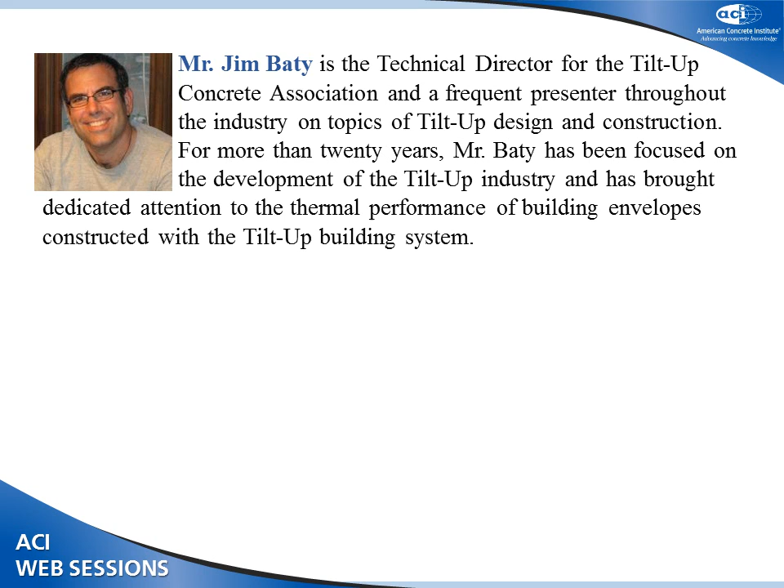So wrapping it up this afternoon, hopefully we'll take a few steps through this topic, and then maybe that's going to encourage you to come up with some questions that the rest of our speakers can join me and we can talk to you a little bit about. But I want to talk about the global acceptance of tilt-up and the global implementation of tilt-up. One of the things that we tend to do in the industry specific to the U.S. and to our associations, we tend to look a little bit too close to where the volume of tilt-up is.

And there's no denying the fact that the volume of tilt-up construction has largely been in the U.S. It's largely been in the big box market, the Target distribution centers like Ed showed. There are some incredible projects and incredible density of projects in the multi-story buildings that Sean has taken us through. But it's the idea of dramatic form and the global acceptance of that dramatic form that I find to be one of the more intriguing things about tilt-up.

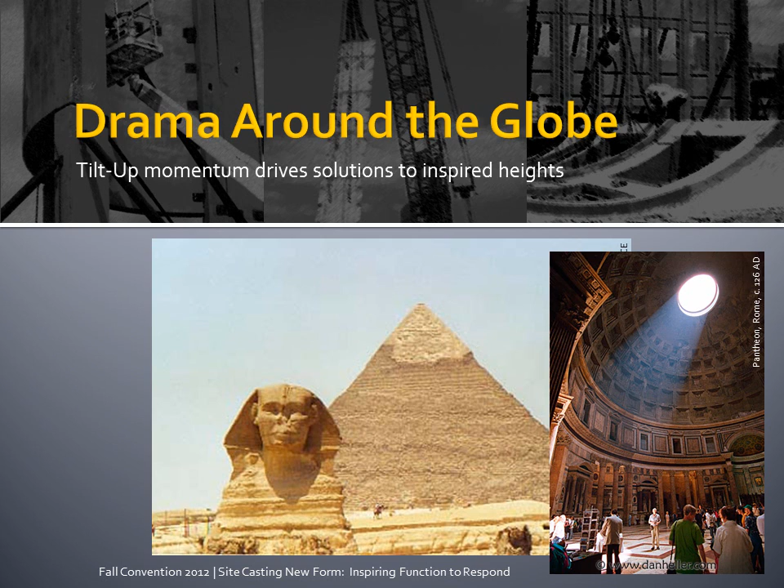And so what is drama in form? What do we think of when we think about dramatic buildings that stand in the landscape and give us a recognition? Now, historically, drama has come from the presence of the building in its final state. And so, you know, the Egyptian pyramids are one of those that jumps out in my mind. Ed showed you the Pantheon, and certainly that's a dramatic example of building that has existed for a long, long time. Continues to perform, continues to be awe-inspiring.

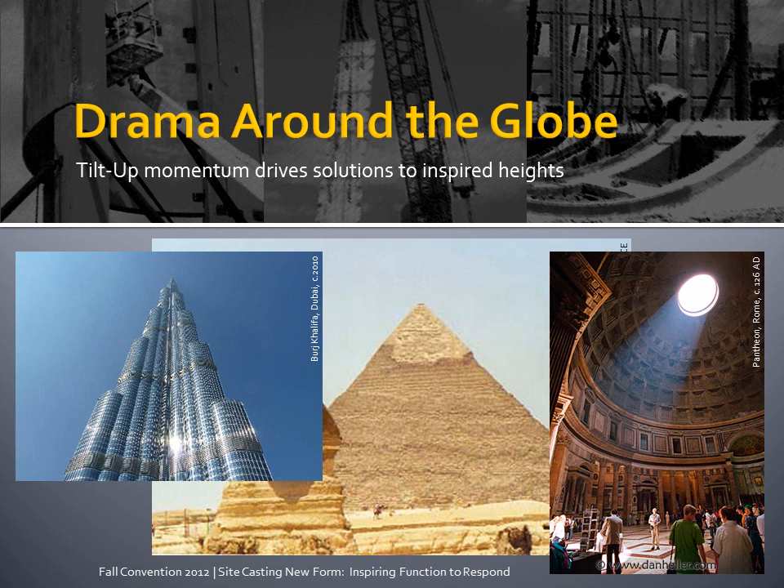And perhaps one of the more recent examples, the Burj Khalifa, is an example of modern technology that once the project is finished is a statement of dramatic alteration to the landscape. But realize that in all three of those examples, there was this tremendous duration of building schedule that had to take place. And at any one point that you walk away from the construction and come back, there's liable to not have been much change. So over hundreds of years the pyramids were built, over multiple years the Pantheon dome was installed, and over many, many months of work cycle, Burj Khalifa was put in place.

So I'm going to take you through some equally as dramatic geographic locations. I'm going to look into South Africa. We're going to look at 4 projects in South Africa: the Freedom Towers and the Walter Sisulu Square of Dedication that you already got some glimpses of in Ed's presentation. Sibaya Casino also, Ed showed you a little bit of that. Another fantastic project, the Gateway Theatre of Shopping. I also want to then go to Jordan, and we'll be looking at a housing prototype, so that we can get a sense for drama of form and drama of development and delivery in 2 dramatic scales if you look at those last 2 types.

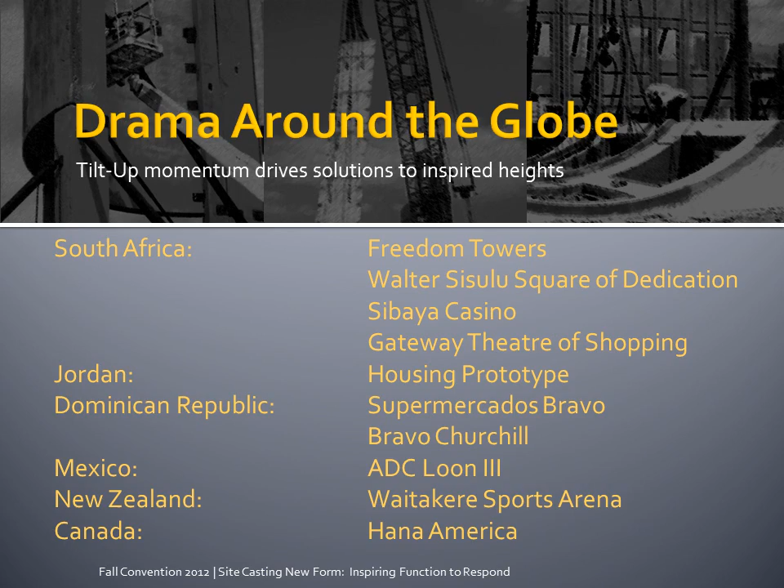Well, I'm also going to be in the Dominican Republic looking at Supermercados Bravo and Bravo Churchill, in Mexico at ADC Loon III, in New Zealand at the Waitakere Sports Arena, and back here in Canada looking at Hana America. And so from a global perspective, being able to take a look at drama, form, and function, I want to take you through 4 concepts that I have for you today. One is we're going to identify the presence of drama. How does drama in tilt-up differ for me in terms of looking at the here and the now and the process versus the drama of form in its eventual position in the landscape that you see in the pyramids,

Burj Khalifa and Pantheon. And then from that, understanding the liberating freedom and why form creates such drama in tilt-up, but it's the process itself and the liberating freedom that comes from the construction process that delivers that form. And from there, I'm going to use some of these examples that I've just listed for you to visualize the powerful form that's available. We've seen a lot of that already, but create some more examples in your mind that ultimately allow us to see the partnership of that form, the delivery method, and how the functionality of tilt-up structures are changing because of the form that's able to be delivered.

It's really my goal today. So let's start off with the presence of drama in the tilt-up industry. And for me, drama isn't that final building. Even though the One Haworth Center is a fantastic project and is certainly emulative of the type of drama that exists of a final production or construction delivery to the landscape historically, it's the process that gets you there that is so dramatic in tilt-up construction.

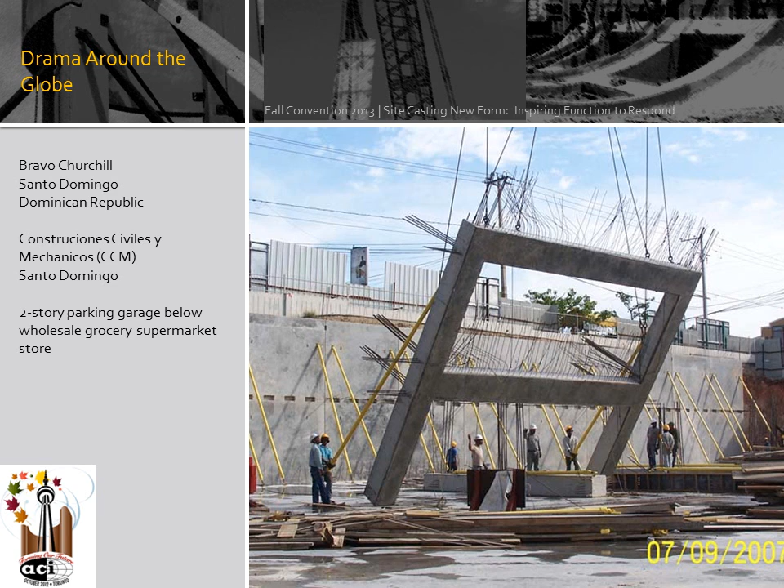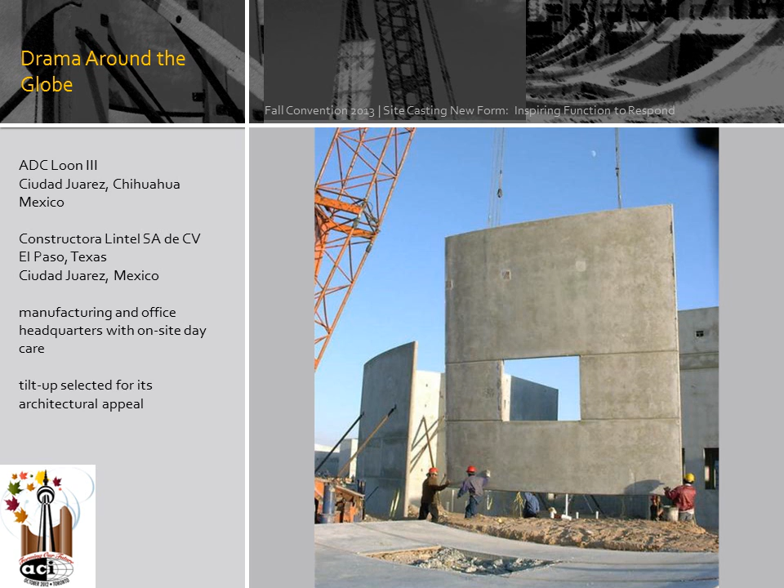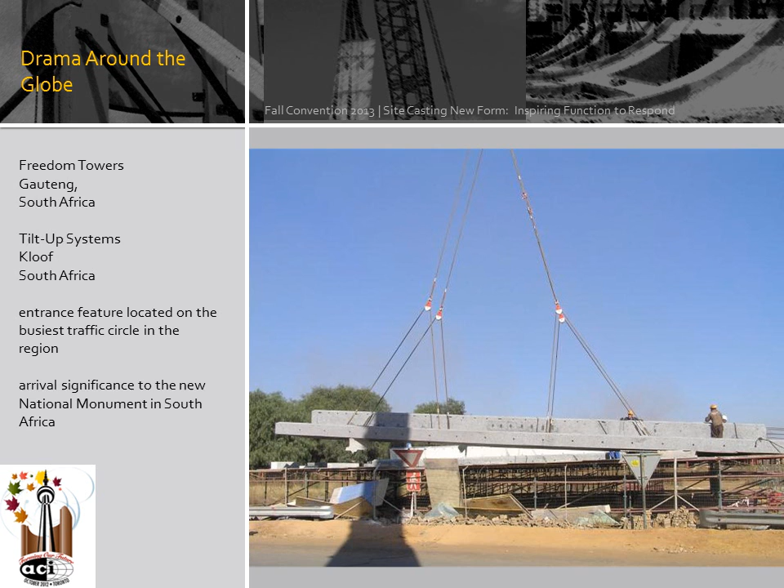And this is the erection process for Gateway Theatre of Shopping. And again, really large panels in relation to the scale of the site, but because of the size of the building, even the size of the panel that is so out of scale to you and I, the panel itself is so out of scale to the building itself because of the sheer size of this project. 3.42 million square feet under roof in this shopping mall. So a project that any of us would envy the opportunity to deliver.

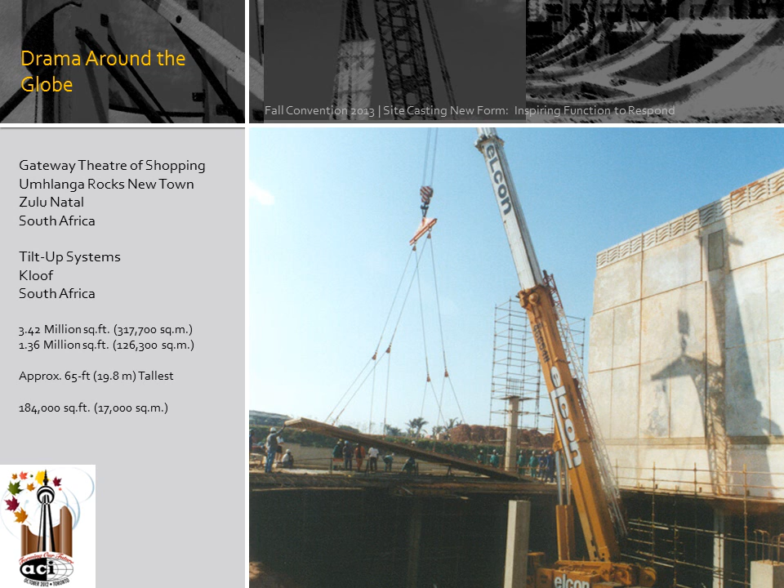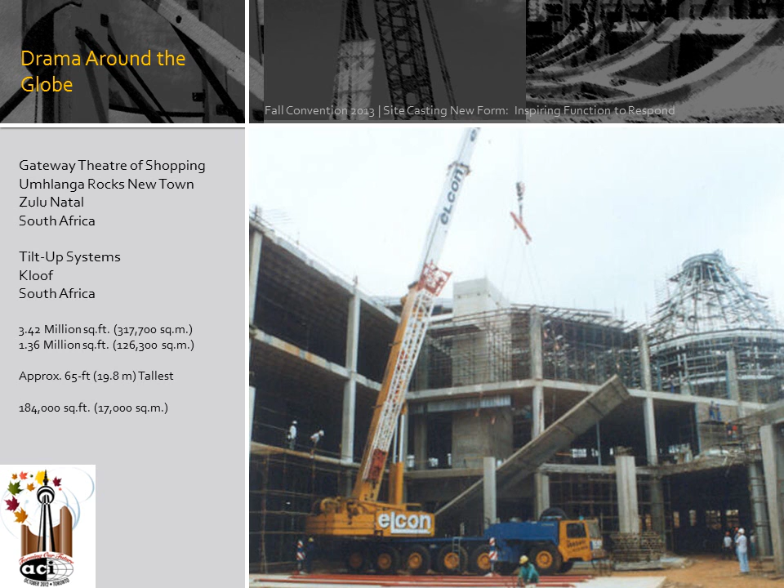And this is just an interior view of a panel going up in the courtyard portion of this project. But again, the sense of scale as 3 stories of larger than normal story height plates are being closed in by these massive tilt-up panels that were horizontal at one moment and vertical in the next. And again, another very large panel. This is the Supermercados Bravo project, also in the Dominican Republic, and you can see the variety of openings that are achieved in that. But the mobility of these panels on the job site, and the fact that here's a rather large mobile crane that is responsible for lifting this, getting it to vertical, and then moving it across the project site.

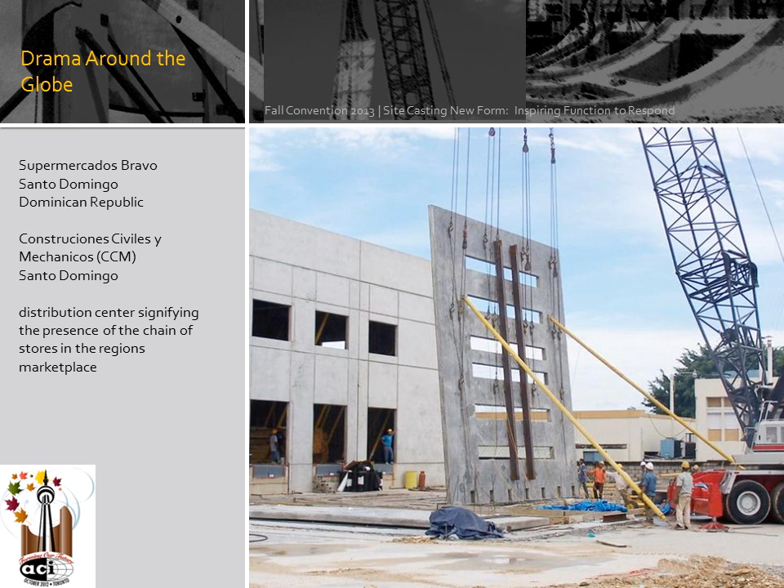And in relation, in many respects, to the project that Kimberly just showed you, the museum project, this Hana America project in Niagara Falls, Canada, you can see a very unique application of a tilt-up panel, somewhat like Sean showed in the multiple-story individual height panels going up. But look at the large return that happens on this panel across the top and down the side, and they're literally hanging this panel off of 3 masonry columns, if you will, and you'll see how that gets folded into the project itself. But some very dramatic movement taking place on the job site.

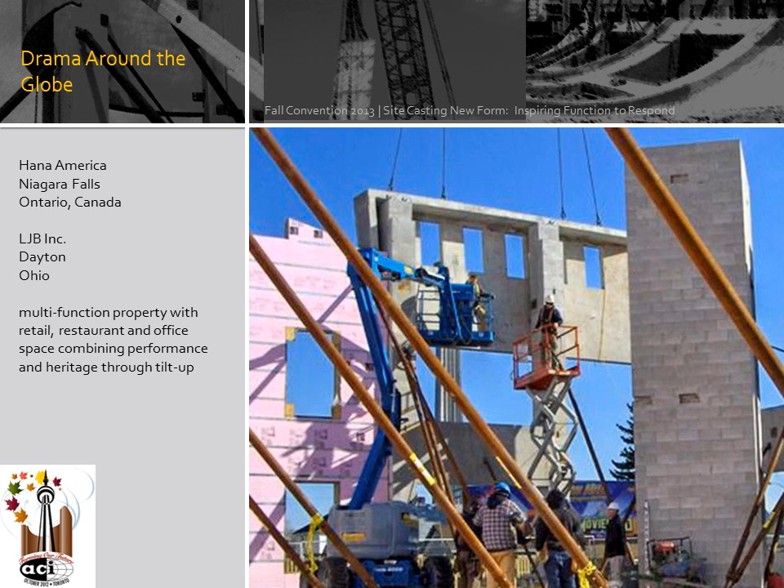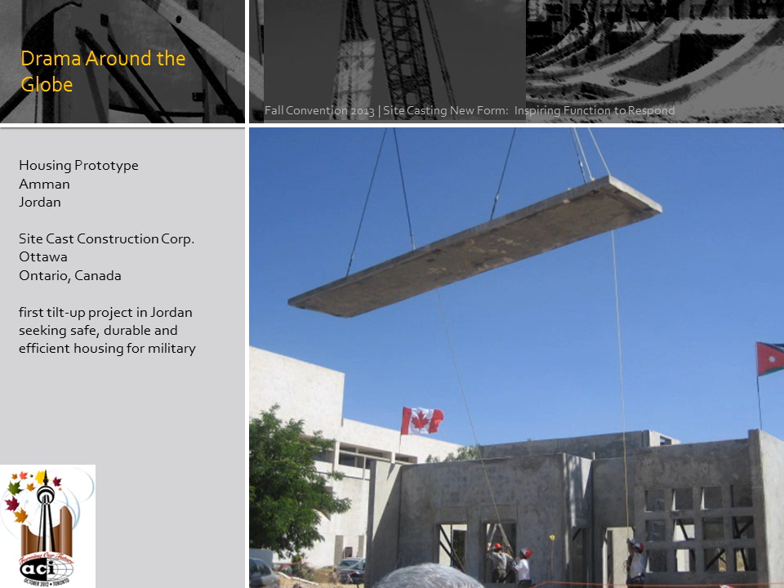And then over to Jordan, and here you have the substructure for a prototype house that was set in place, and then one of the final roof panels being set by aerial crane here. Now, this is probably one of the best examples of there being nothing on the job site, and then all of a sudden there being something on the job site, and that something being a finished structure. And so the drama that happens in tilt-up construction oftentimes results in almost a pure horizontal site that could be mistaken for somebody preparing a subgrade slab, and then instantaneously, in a day or 2 days, there being a structure there that is now the visualization of the dream that the owner had, and the delivery of the design and the intent that the architect put in place. All of a sudden the contractor flips a switch in many respects and dramatically makes a building appear.

And of course we can't talk about form and movement and drama in tilt-up without going back to that image that you saw earlier from Walter Sisulu of this radically curvilinear panel that, in this one, is flat at the base and curved at the top, and it has sister panels that were flat at the top and curved at the bottom.

And the fact that the very nature of picking this concrete panel up while it's still wet until it forms itself the curve that it wants to be and then cures. No, really, it just cured. I'm just teasing you. But this panel was built as a skateboard ramp.

I mean, you can imagine maybe some teenagers after that panel was lifted going back to the form and having some fun and spinning their wheels along their skateboard ramp. But a very dramatic example of form moving across the landscape and developing imagery for the owner.

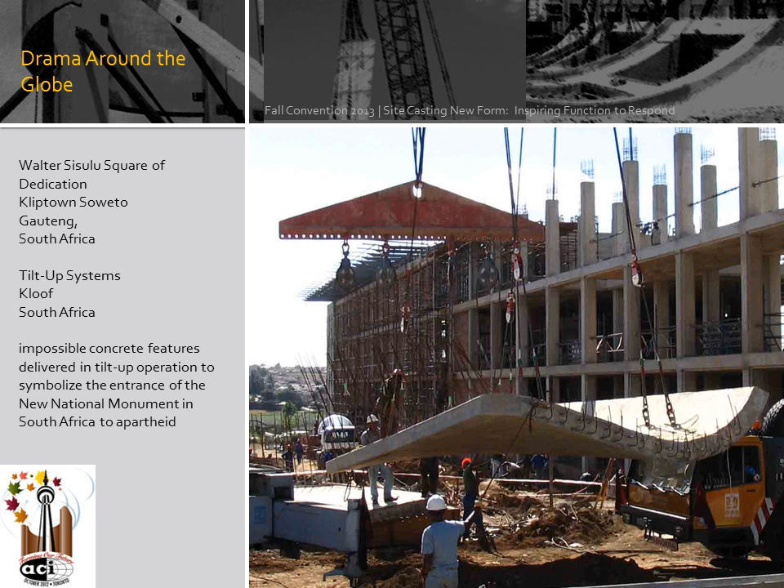So how drama of form takes shape because of the nature of tilt-up construction is what is so unique about this site cast method of delivering building technology. And it's very liberating freedom. The essence, the basic nature of the process that gives it that liberating freedom.

Here's another view of that massive tilt-up structure frame that I showed you before from the Dominican Republic. Again, a 2-story parking garage, and you can see the successive frames that were all site cast on this base slab that's 2 stories below the rest of the grade. And those are all stood in place, ready to be tied in with some cast-in-place beams that will connect them all, while at the same time tilt-up panels are being erected around the top.

I guess I could use a pointer here for you. While the tilt-up panels also cast in this same slab area are being stood up into the perimeter, both as retaining walls for the grade and the above-grade structure that will house the supermarket above.

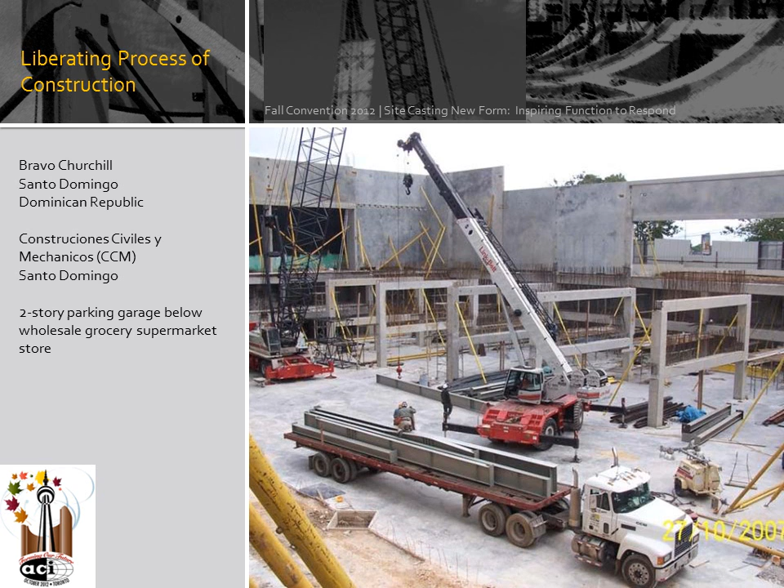And the fact that tilt-up construction begins horizontal, begins on a simple concrete slab, whether that's a structural slab, most often not structural, but here you have what vertical formwork only amounts to the thickness of the panel. So literally anything that is created in the minds of the designer, and certainly as Ed showed you from Mitch's design for that Korean War Memorial, virtually any dream that can happen can be placed in tilt-up technology.

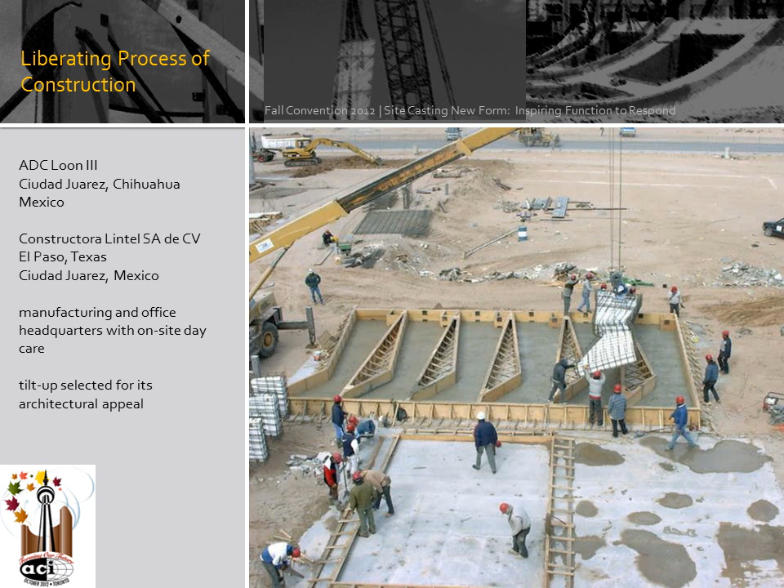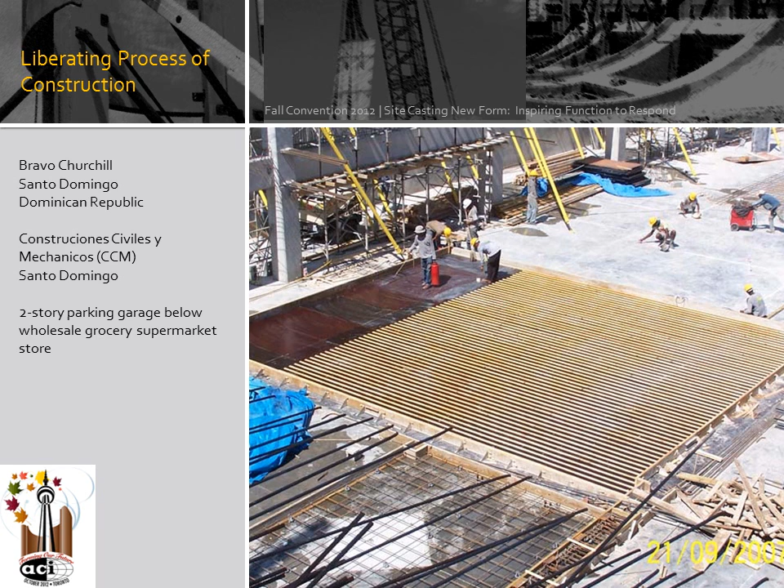I've been on this project. It's a very, very striking project, although when I show you the final version of it, you're going to go, well, that's no big deal. But there's a reason for that. So again, it's in the drama of the construction.

And the site itself, the fact that all of these panels are all laid out, and this is that horizontal nature, that fact that you show up one day and the site's flat, and you show up the next day and the site is suddenly built, or maybe less than a week later.

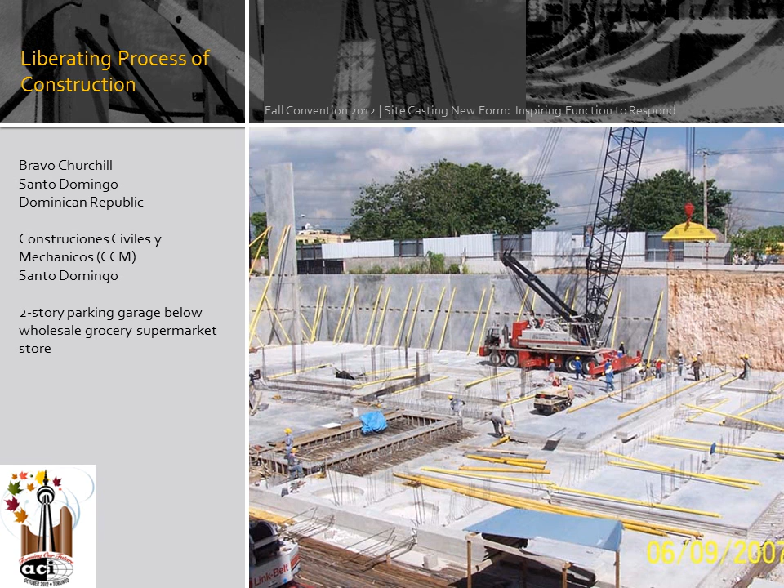But all of these panels are arranged and planned in their specific location, and the fact that in this project, here we are below grade, and yet they've got this crane that drove down into the basement and is setting these panels. And I can imagine what this site was like for all the residents of the community as they're peeking over the hurricane fence down into this hole and watching these massive panels being moved around by crane. Truly a dramatic instance.

Here's one of those structural frames being set. You can see the rebar that sticks out. So the contractor, who was also engineer for this project, broke the parking garage into these horizontal frame structures, replicated them as many times as he could, stood them, braced them, and then the connections between the two of them, they just formed up cast-in-place beams and tied all of those frames together.

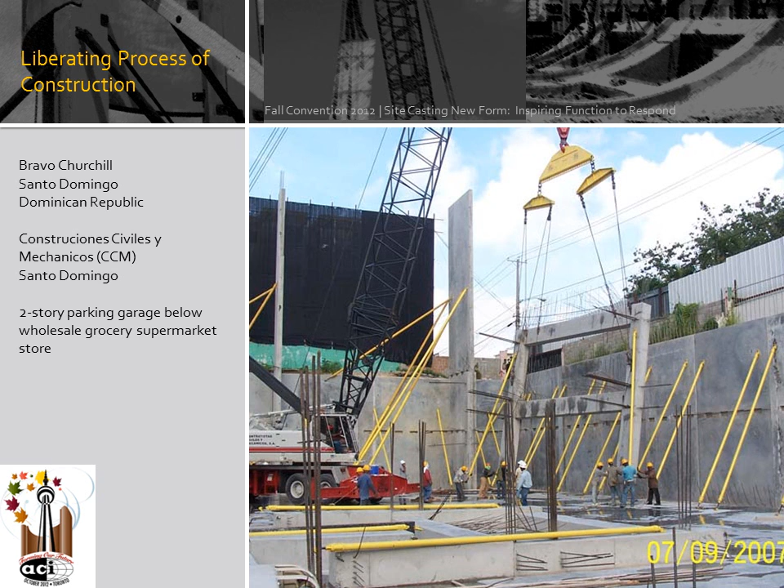So it eliminated the amount of cast-in-place forming that they had to do, or they reduced it. They reduced the cast-in-place forming by 2/3 and were able to speed up the project. The last time he told me, I think it was something like 2 months were saved in the structural component of this parking garage by being able to tilt up most of the structural frames.

Just another example. And this is regardless of the method of construction, but it's certainly a great example of where drama exists in photographing construction today. But you can see the massive nature of those tilt-up frames, the repetitive braces. That's just an imposing vision in this photo.

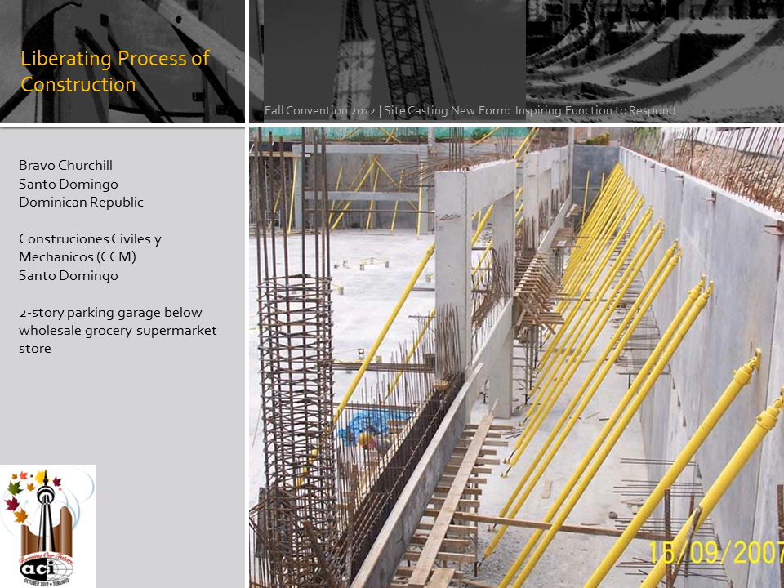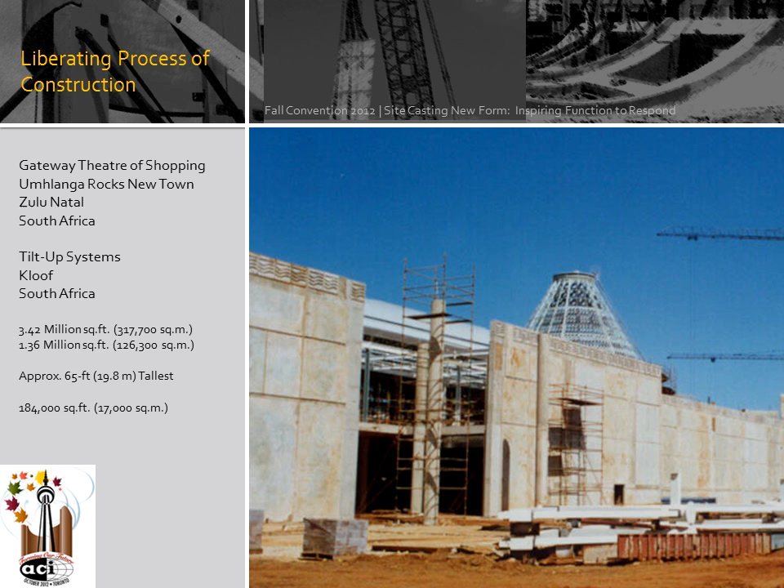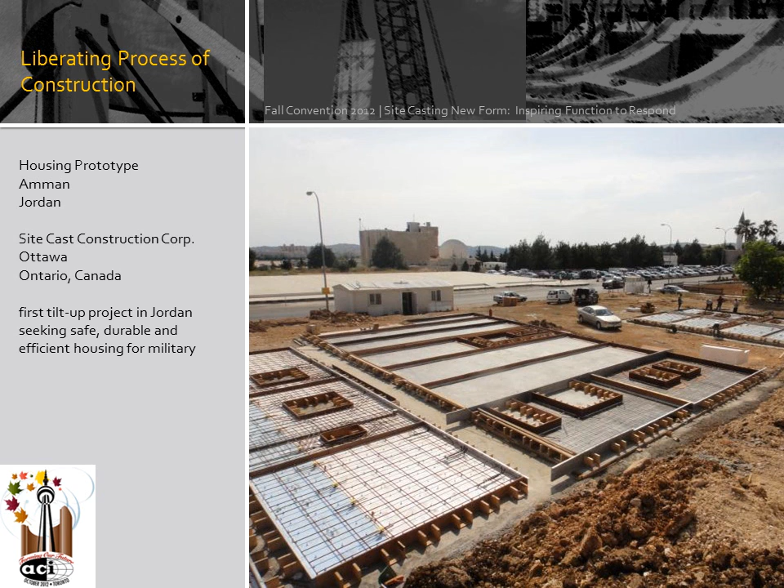And here are the panels. This is it. This is a house set out before you. And that's about all it takes to put up a house. And so literally you can see, once they've cast those forms full of concrete, let it cure for a couple of days, and decide this is the go time. From the moment that the crane grabs the first panel to the time that the crane releases the last panel, it could be a day, could be less than a day, and suddenly there's a house there, ready for somebody to at least begin picturing the ability to inhabit.

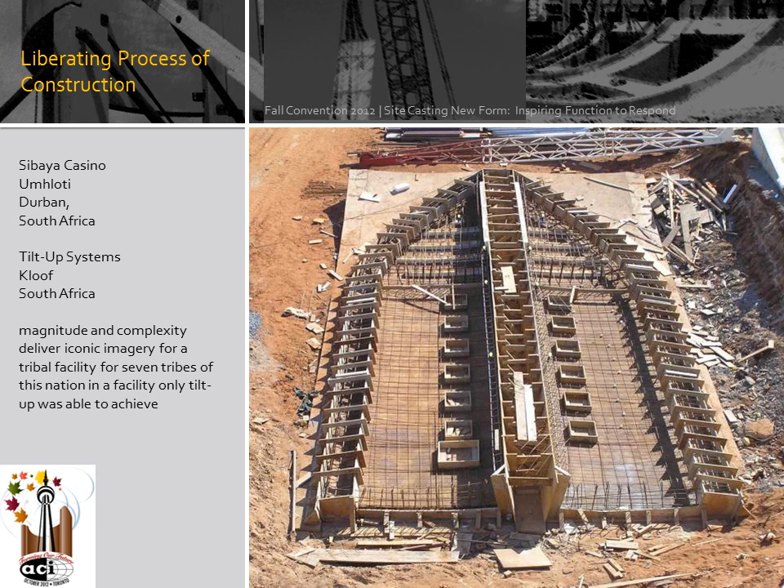And drama certainly takes place in the construction process itself, just in the forming. Now you saw an image of these in Ed's presentation. This is one of the panel sets for that Sibaya Casino project. But imagine tackling the architectural vision with the translation to site forming that took place for this contractor, and having to go from two-dimensional drawing to this three-dimensional reality that is the inverse void he has to create to produce the finished form product. The magnitude and complexity of this in a dramatic example of construction for tilt-up, I think, is perhaps one of the more striking ones that I've still yet to come across.

And this is the skateboard ramp. This is where the teenagers, they left those in place so that the teenagers don't skateboard on the sidewalks. They go to the forms. But who thinks of that? I mean, that is creativity. Creativity that an architect was able to think of concrete, first of all, in that type of a form. And then after everybody, architect, engineer, owner, we're all done saying, well, we're going to have to scrap this idea because we can't build it. And a contractor came in and said, you can't build that in cast-in-place because there's no way to support those forms, but I'll do it in tilt-up for you. That's an example of creativity to the nth degree.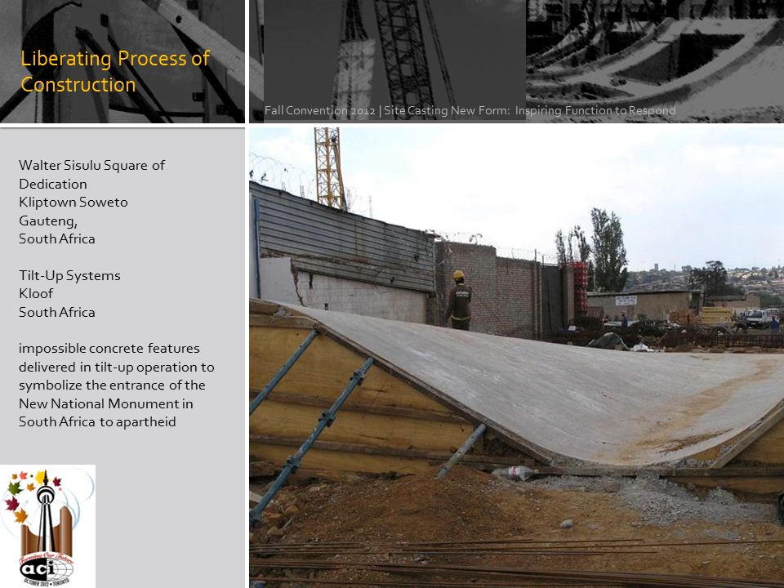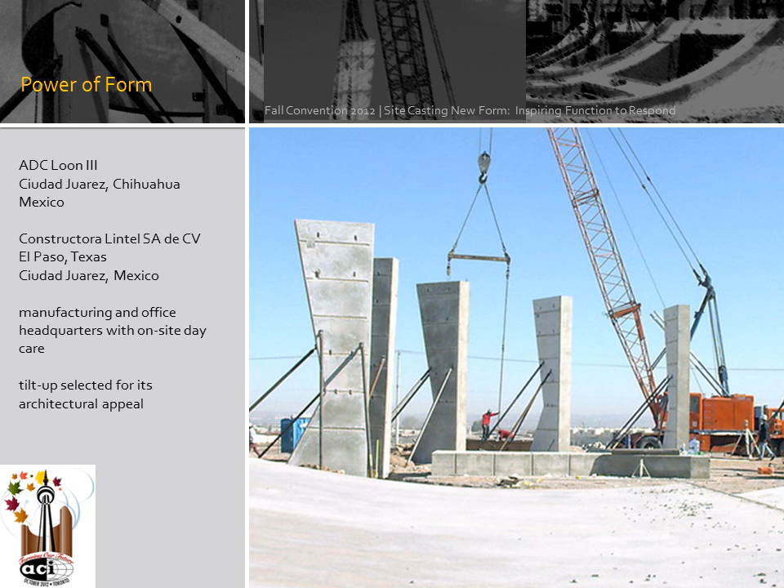So if we haven't had enough of it already, I want us to visualize the powerful form then that results from this liberating freedom of technology. There's your structural columns that I showed you earlier for ADC Loon III in Mexico. These are K columns, or they called them K columns, and you can kind of see, just in the nature of the photograph there, a little bit of the K nature. You can certainly see it in that one. But these columns support curved lintel panels that form the roof structure for a main entry feature for the office side of this manufacturing facility, and then they replicated that off to the side, and it housed the daycare for the employees that come to work at this facility. It's a beautiful example of form in this landscape.

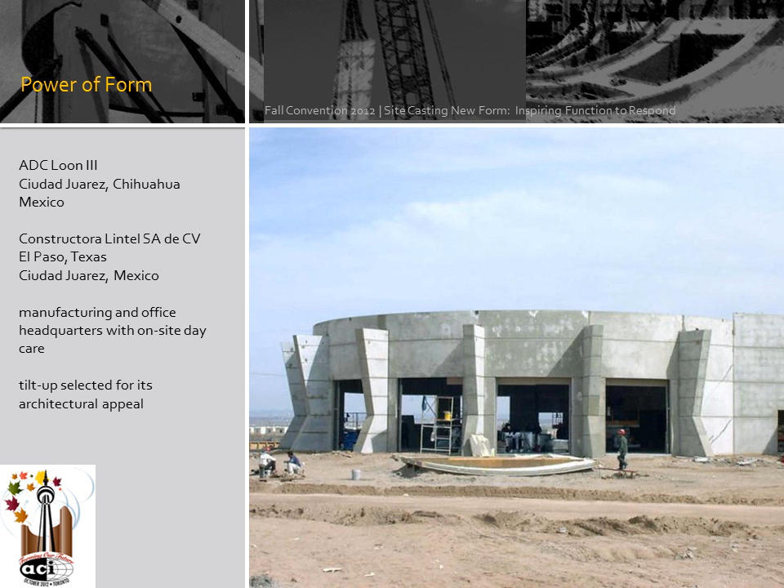Again, here's the structural columns, and set in place over them, these were kind of T-shaped and curved all at once. Lintel panels that hang off of the tops of these K columns, and once welded into place, as Sean said, it becomes a very secure and very dramatic structural component in this particular case as well.

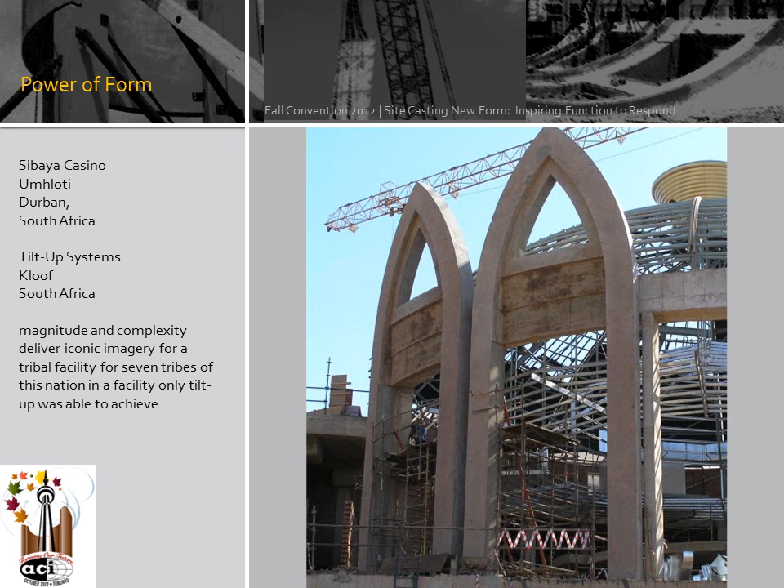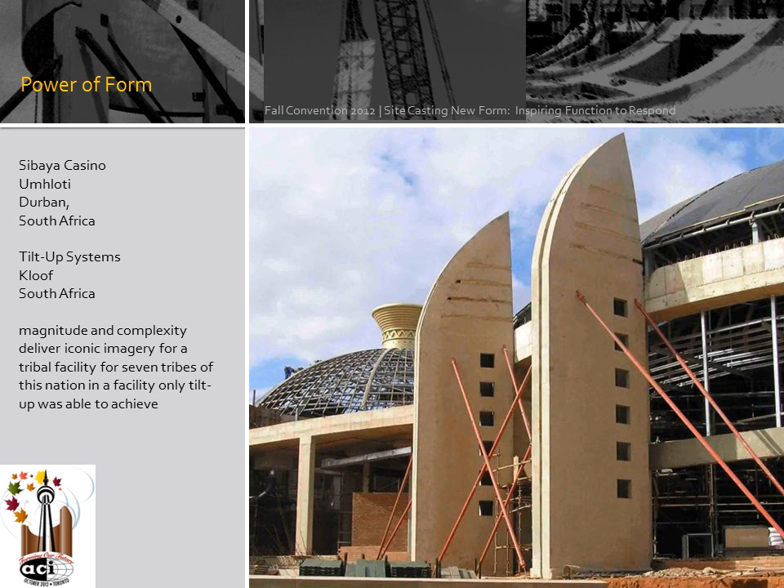And you'll see some variety. This is one of the construction shots of the Sibaya Casino. This project was 7 pods representing the 7 tribes that were in that region that came together to create this casino, and so each tribe has got to have a different architectural variety that at least gives them homage to their tribe. And so each one of these were designed differently, so you'll see that in each of the photos. So we go from structural support that was flat against the domes to these sticking outward, perpendicular to the dome. And these shells are bowed in plane as well as curvilinear in the vertical plane, and they vary in thickness. And so each one of them was unique in its character.

But you can, again, get a sense for drama in the scale of the project. Another massive project. There's plenty of landscape in which to seat one of these in South Africa right now. 3.42 million square foot shopping center, and I believe this is something like 340-some thousand square foot casino.

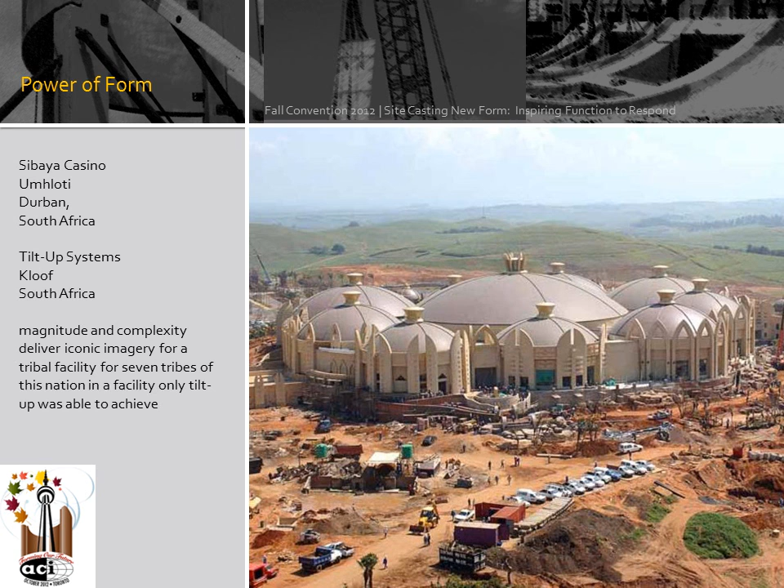But the power of form also can be quite simple, and this is Supermercados Bravo back in the Dominican. And what you're looking at here is a simple tilt-up structure, a simple tilt-up. Ed was showing you monumental tilt-up and signage. Well, this is a single tilt-up panel that is the structure for what? The stair, right. So here you have the entrance.

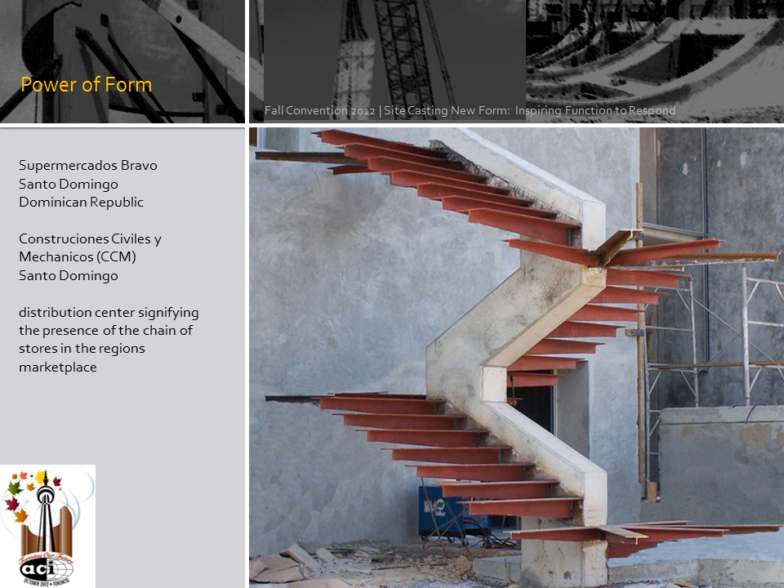This will be the entrance to this facility, and it's part distribution center, part headquarters for what is 7 different supermarkets in the Dominican by this one company, actually a competitor for Bravo Churchill. Now the sad thing is that this building burned down, and so this is the only way you'll get to enjoy this structure, through these photos. But again, it's a very striking and creative use.

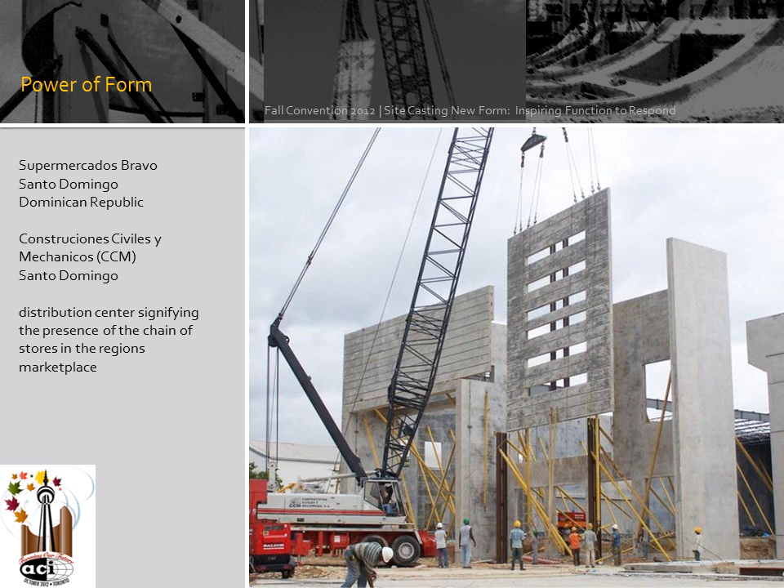This was that panel I showed you earlier being moved across the site, and see how now it's not just going to be a standard footing bearing panel. It's actually a lintel panel that's going to be secured between 2 verticals in relationship to a shorter lintel panel off to its side. And one has horizontal windows, the other one just has horizontal bands.

Freedom Towers that you saw earlier, bathed in the night sky and lit up with color. This is what they look like during the daytime. And these are panels that, depending on which panel you look at, some of them are black aggregate with white cement and some of them are white aggregate with black cement, so that it gives the homage to the monument to apartheid that was symbolized with this Freedom Tower and the freedom that was created in South Africa.

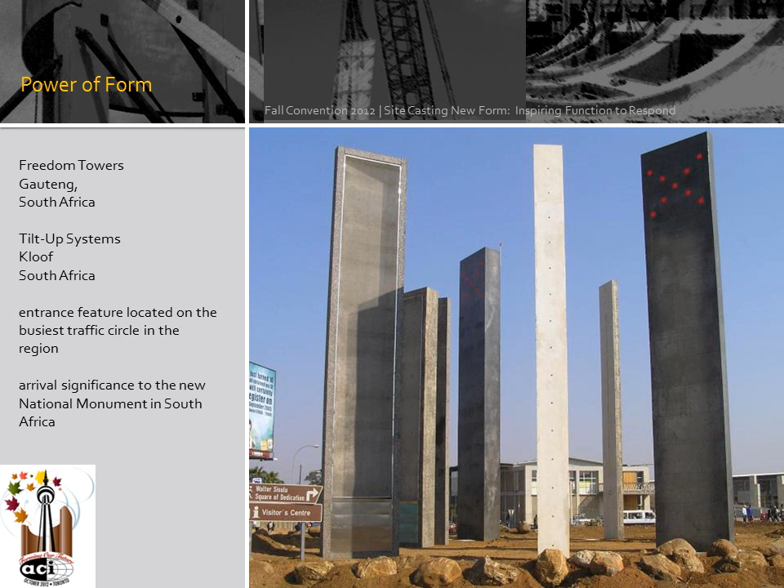But these structures are massive. These are 67 feet tall. They're cantilevered from the ground, and the panels themselves are shell-shaped. In other words, they have a vertical and a horizontal return on this that we're looking at on the face side, and some of them are flat on the back and some of them have a central rib on the back.

And this is the Sisulu project. I believe we saw this photo as well in Ed's presentation. But the drama, the power of form as this horizontal curvilinear panel then gets turned vertical, and begins to be set into the form itself, into the building form, and how that begins to relate to size, position, movement around the site, and scale, looking at the construction worker.

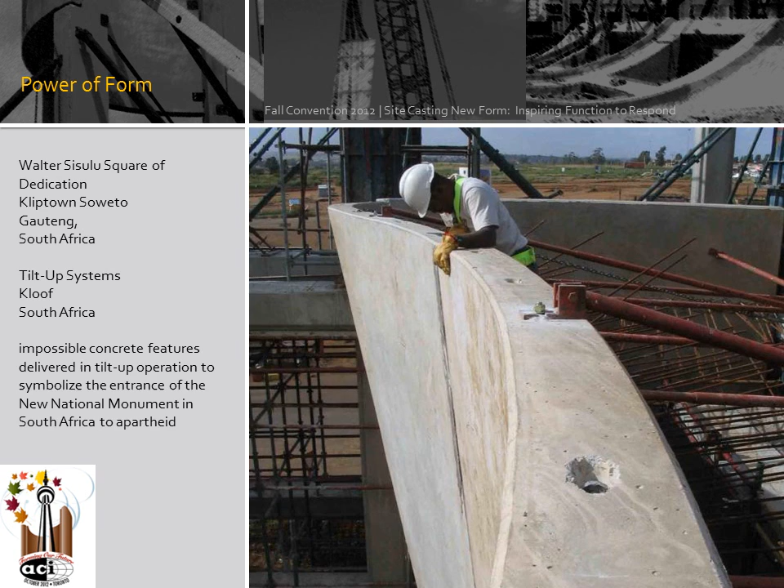So finally, from all of that, from the presence of drama in the construction process itself, facilitated because of the very tactile and horizontal, simplified nature of tilt-up construction that gives it its freedom to really move and shape and develop diversity in form, is the fact that function then flows from that or is affected by that.

Now, ultimately, each of these structures was an answer to the intent for the project. None of these projects flowed out of an idea that, hey, that'd be a cool way to build a panel, let's see if we can build a building around that panel. I'm not suggesting that, but I am suggesting that the function, the true function or the use of that building is augmented or altered because of the presence of that form and the ability to deliver that striking form. And it changes in different ways.

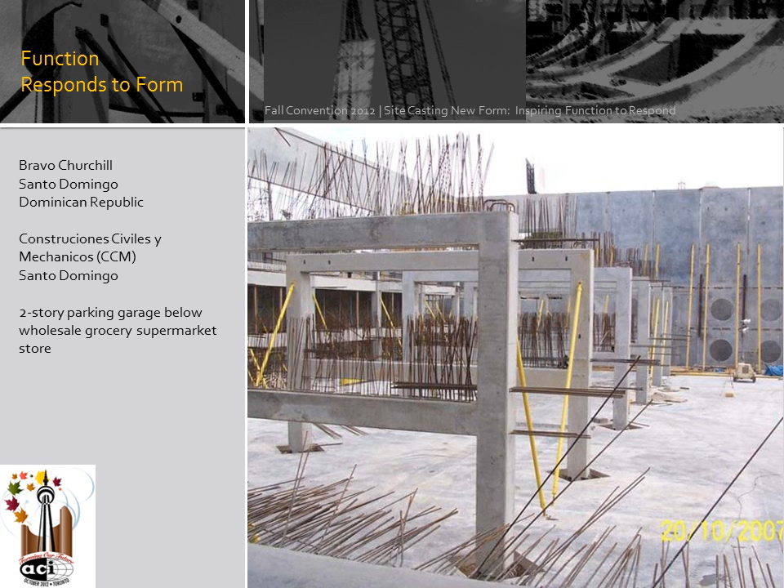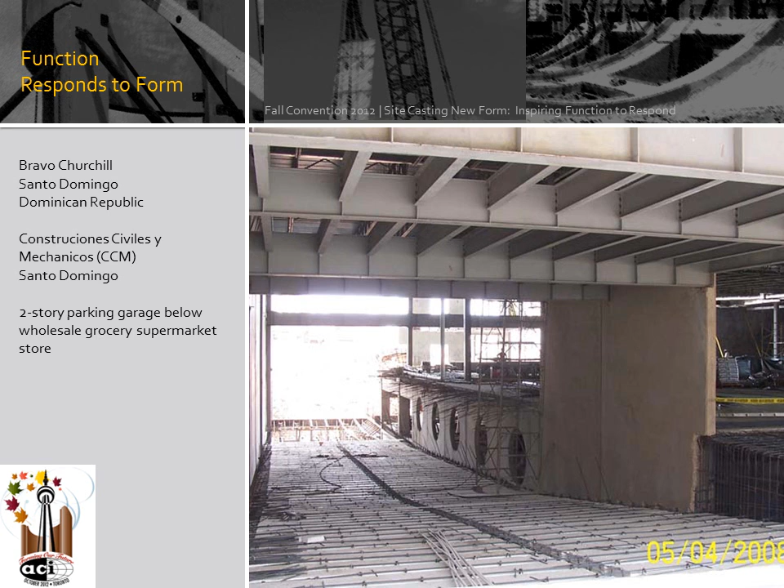You know, this is a very striking, perhaps one of the more striking ones in my presentation, but when it's said and done, you drive down into this two-story garage, and it could be any two-story parking garage. But the scale of it, the fact that you're driving by these tilt-up panels, and where do you see circular concrete openings like that but in a tilt-up panel? And so you drive by that as you descend into the parking garage.

And this is what I was telling you earlier about the final structure. Now, if you walk down the street in Santo Domingo and you look at the side of that building, you'll never know any of that exists until you drive your car down into the parking garage, by that tilt-up wall with the circular openings, and you drive your car through the tilt-up panels, and you can truly see the difference where the cast-in-place beams are and the rest of them are tilt-up frames.

But perhaps more dramatic than anything else is that it facilitated the presence of a two-story parking garage and a supermarket in a metropolitan area where there's no land available to build something of this nature. The reason they have 2 stories of parking below grade is because there's no land available. The land's been eaten up for a century or more. And so they have to build vertical. They have to go below grade.

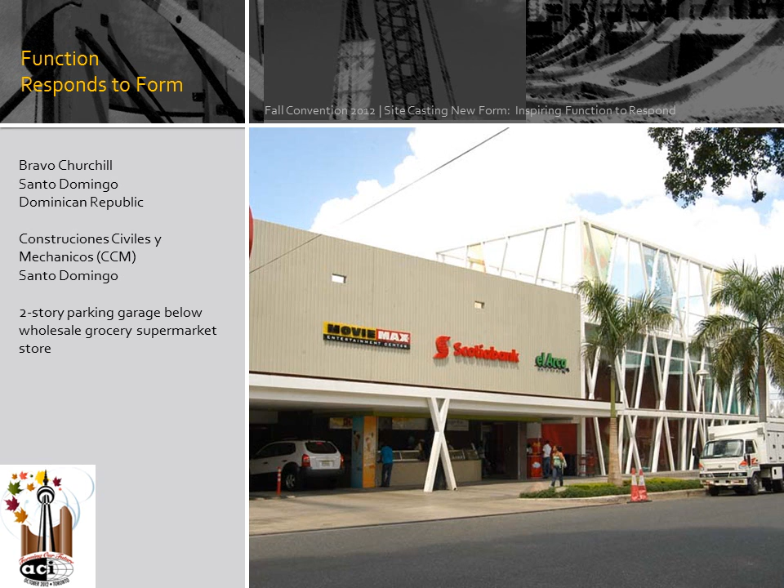And being able to do that on a zero lot line relationship, in fact, they actually built underneath portions of the sidewalk, is truly dramatic in the ability to deliver that function for the city.

This is stepping back from that Hana America site in Canada, and this panel that's hanging, being supported by these masonry columns. So you get a sense of lintel and function, or of form, and how it relates to some of these other tilt-up panels around it.

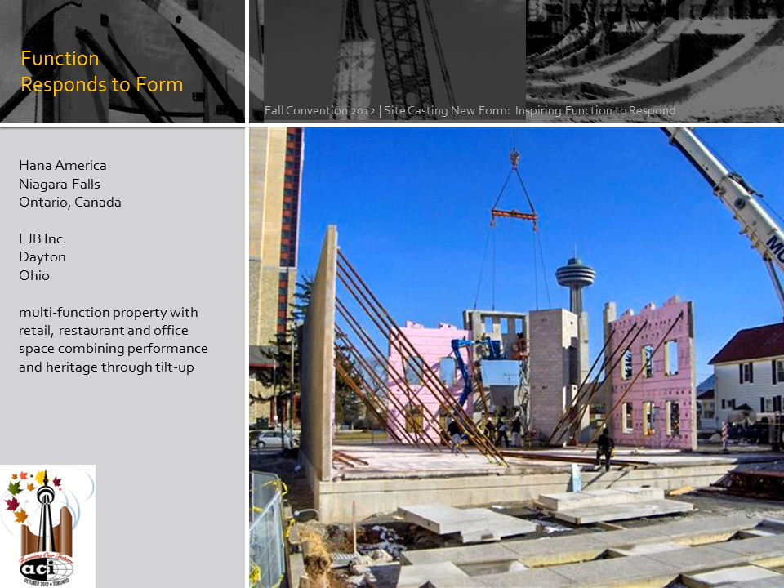But there's the entrance corner, and how dramatic a statement this is for the entrance of what really is a very small structure. If we were able to see the drawings and look at the floor plan for this building, it's really meager. There's not much to this building until you step back and you look at the form that was delivered and the structural integrity of these tilt-up panels, these what look like fingers growing out of the ground to support structures all around it, and then this crown for the entrance feature.

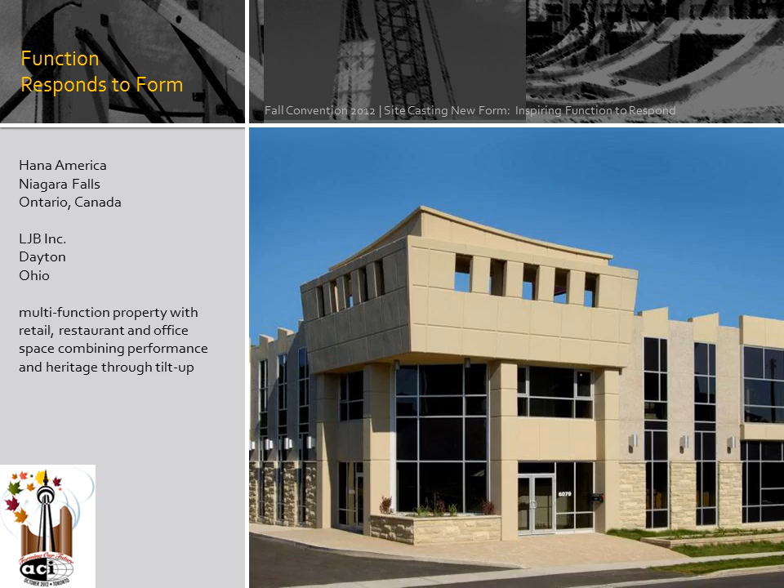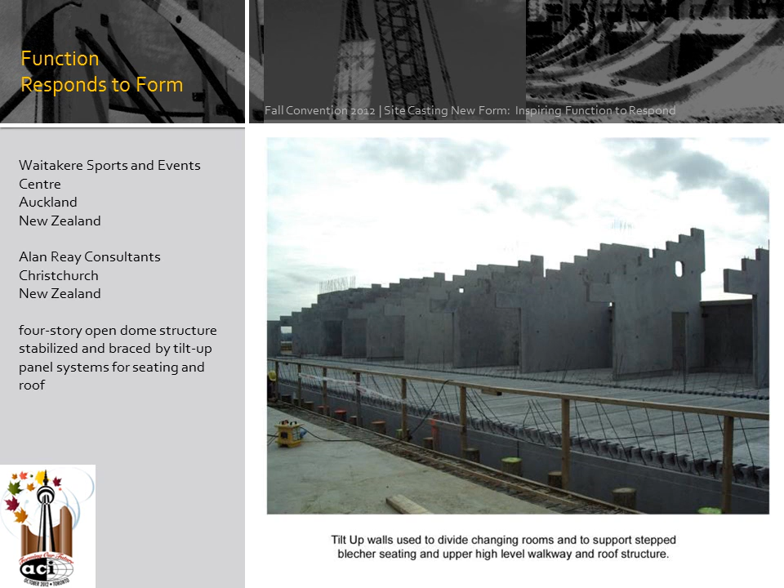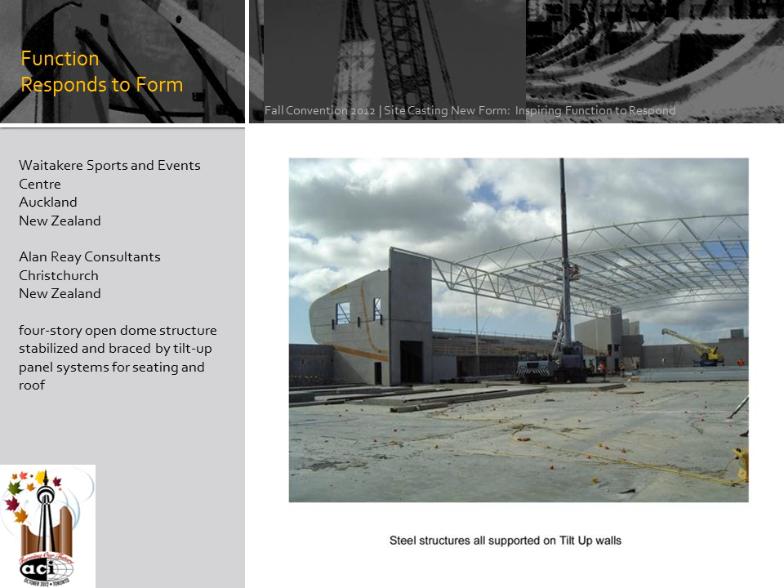And if you think in your mind's eye of 7 or 8 of those stacked on top of each other, replicating the form, and then literally pulling them off like a deck of cards and setting them in place, preparing the facility for the structure. But this project went a step further, actually a huge step further. Here's the seating, so all those structural stanchions are below, but notice these massive panels out here. These are tilt-up buttresses that grab a hold of the massive spanning steel joists, steel girders that free span the interior space of this sporting and event center.

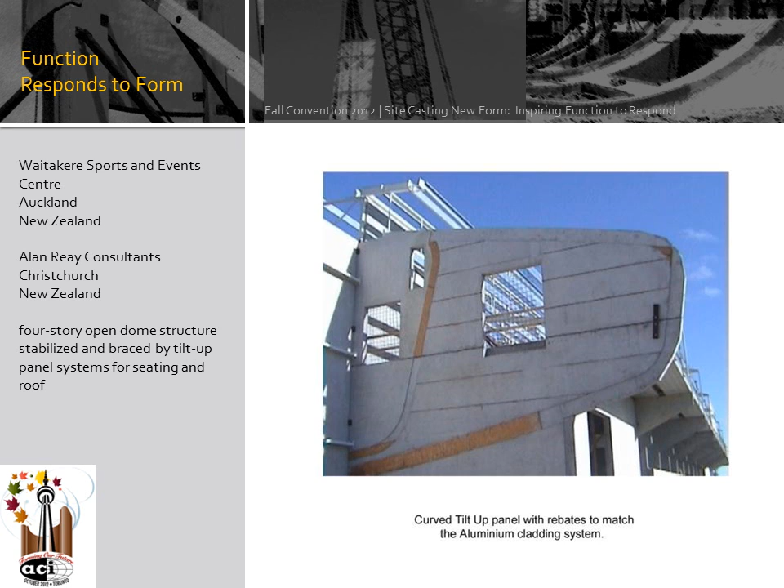So Ed talked about the Pantheon and how that was bested by the Houston Astrodome centuries later. This is a step beyond that, maybe not in size, but certainly in building technology, and how simple it was for a tilt-up contractor to cast this panel and to set this panel and to brace this panel, but how efficient it is to support this single-span roof that then gives the interior of this facility.

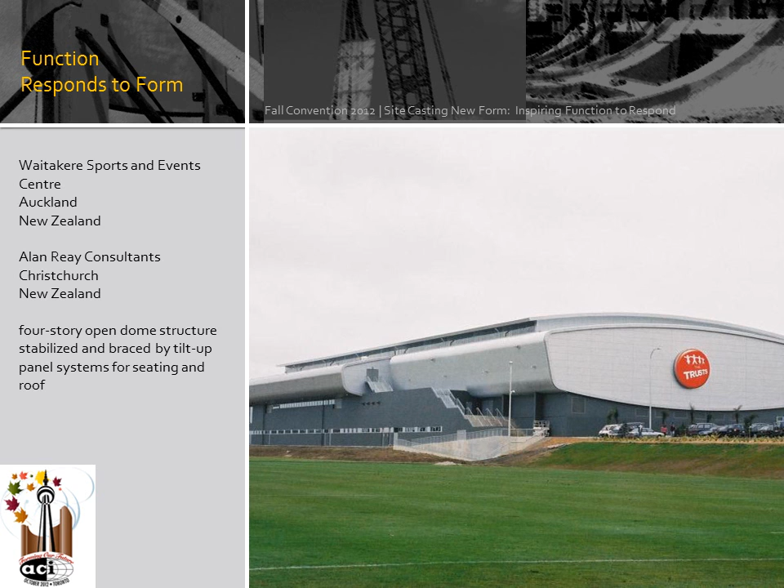And then those P-shaped buttress panels give you that final form that they clad in metal. So again, you would never see that in the final form. And so the drama of tilt-up oftentimes gets hidden, gets lost once the construction is done.

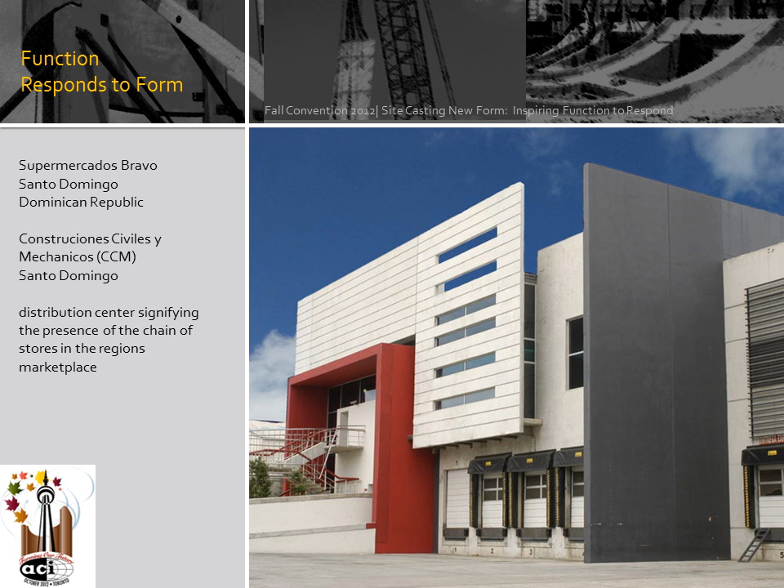Now, what does that stair tower look like? Shopping cart. Isn't that cool? Pretty creative.

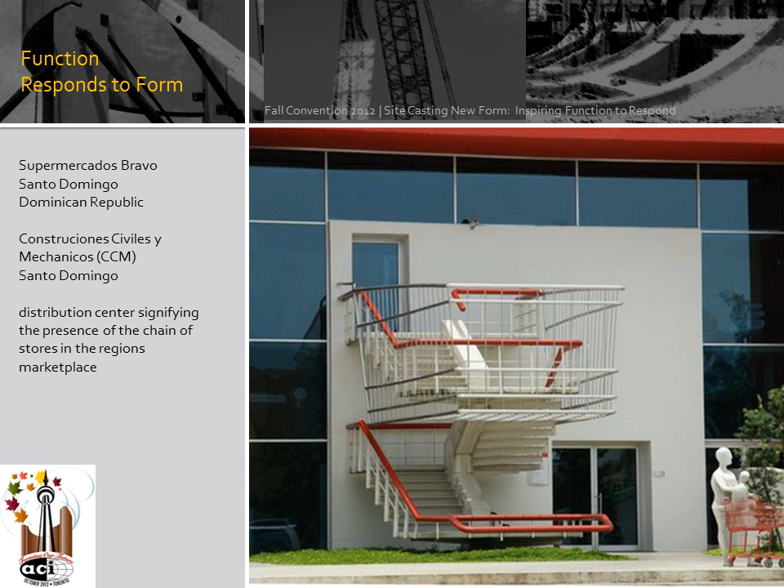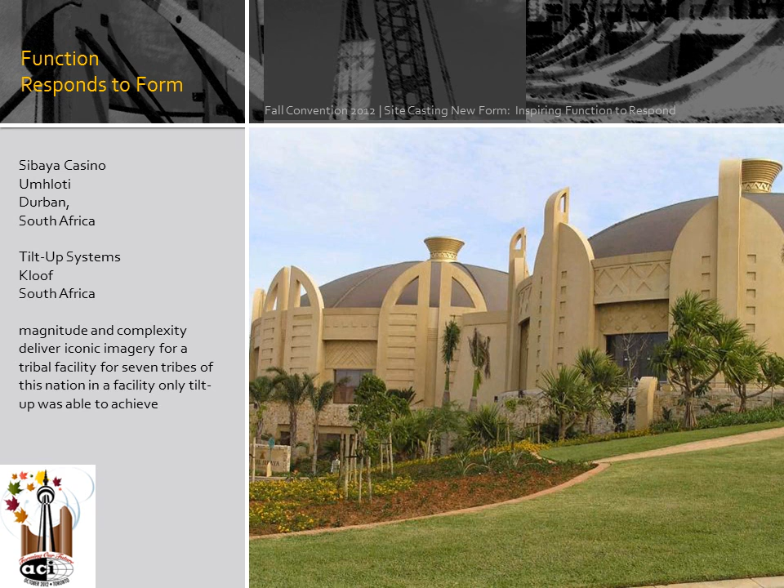And there's the finished look of the Sibaya Casino in South Africa. Got to be one of the top 4, top 5 most dramatic tilt-up structures ever constructed. Sean's trying to get one of these built in Quebec. And I think the night shot of this project is probably the biggest benefit to it, and how those tilt-up structures supporting each of those pod domes play a role in the lighting and the presence of that facility at night.

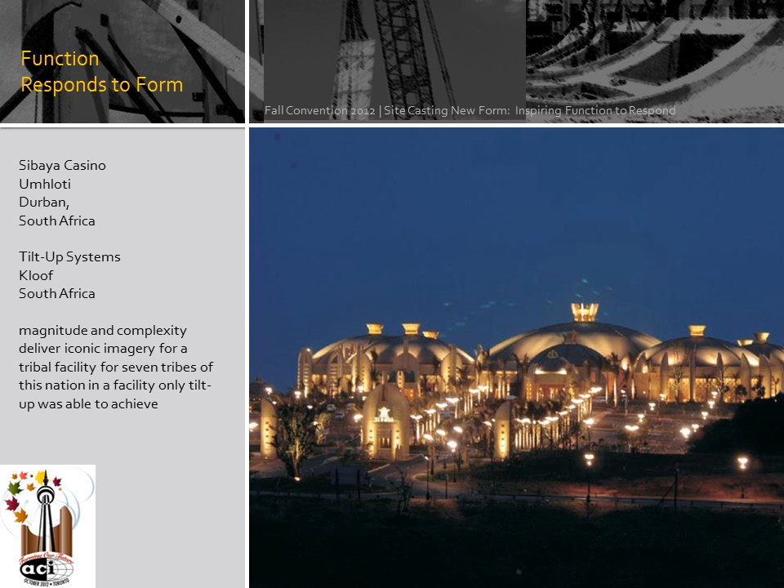Well, let me back up one. You can also see that they didn't just finish with tilt-up buildings around each of these pods, but they made tilt-up panels that span all the way through the landscape and create the promenade entrances to each of these facilities. And you've seen this one already. Again, a very striking depiction of the Freedom Towers at night.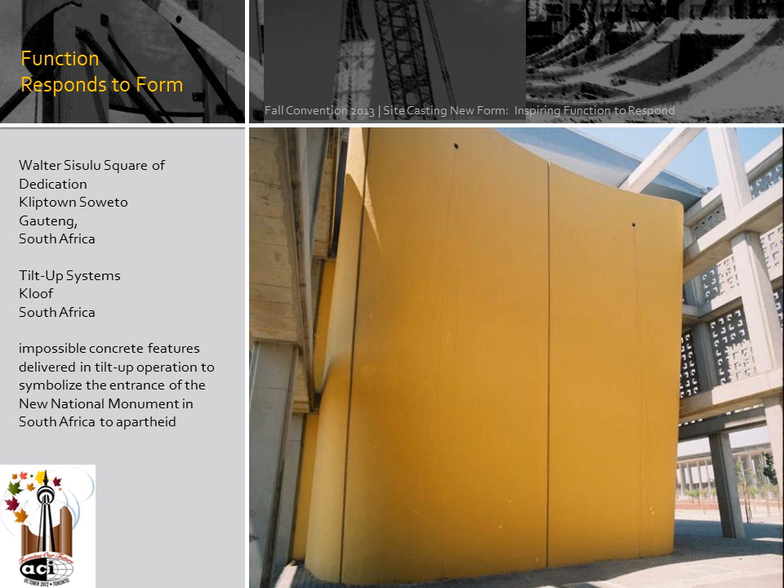So there's a living nature to that wall as it sits in the use of that facility, and how now the function of coming to that dedication site and moving around and interpreting that site is affected by those yellow panels. And here's some final views of that very massive shopping center, and you can see the size, the scale of those panels. So there still is drama that exists in the finished landscape with those panels.

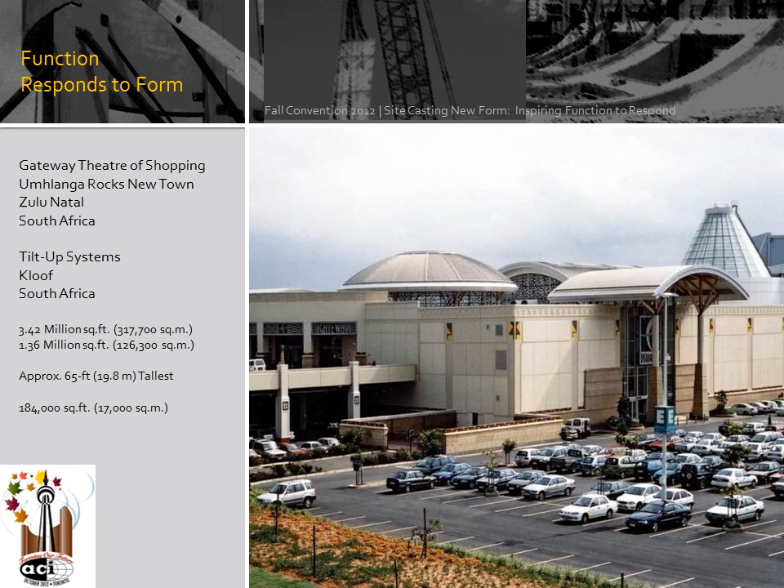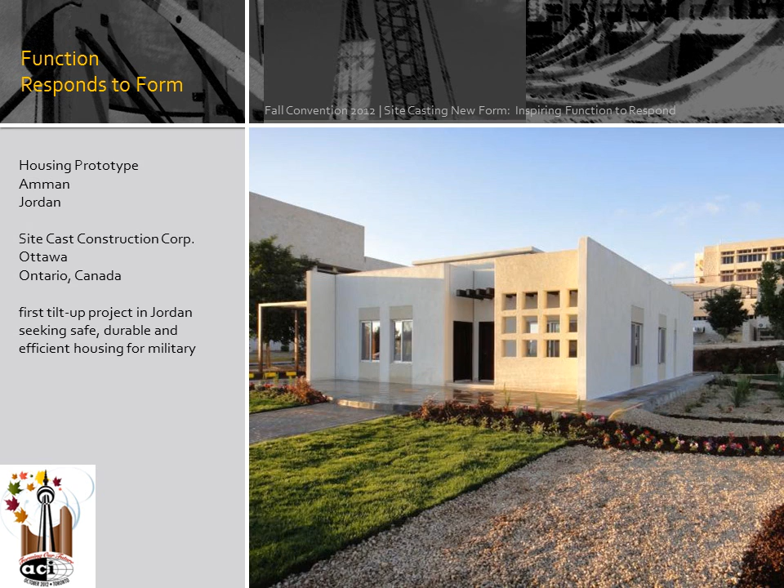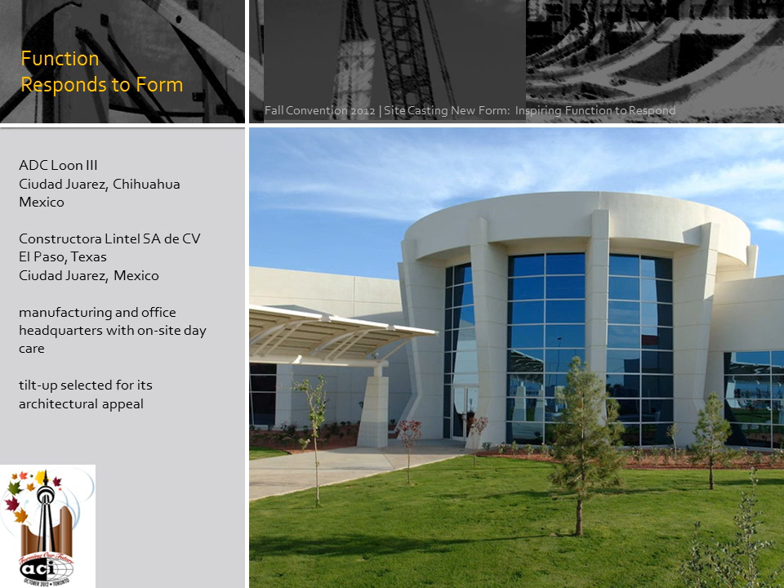And just a finished shot or two of ADC Loon 3, the final painted version, installed glass, and how that sets apart from these massive structural columns that support. This is the entrance feature to the office, the headquarter component for this manufacturing facility, and I had previously shown you the construction view of the daycare center.

So drama exists in a very real nature, drama of form in and around the tilt-up industry. It's the presence of that drama that I think is set up because of the very nature of its construction process that the contractors have begun to professionally employ and embrace, and also to explore, because once they achieve a certain level of proficiency with tilt-up, they're actually looking for where to go from there. It's not a static form of construction that once you get to a certain level of knowledge that you're done. You now just build tilt-up that way the rest of your life.

And from that, the visualization of that powerful form that exists, so that there's a whole series of generations that come after these talented contractors and designers that are employing it that can begin to look back and can feel and can get a sense for how they shaped the presence of the function of working in and around those forms, as well as then our ability to translate that into life. That to me is the drama and the form, the function of tilt-up, and it's also kind of the purpose for why we put on this technical session.

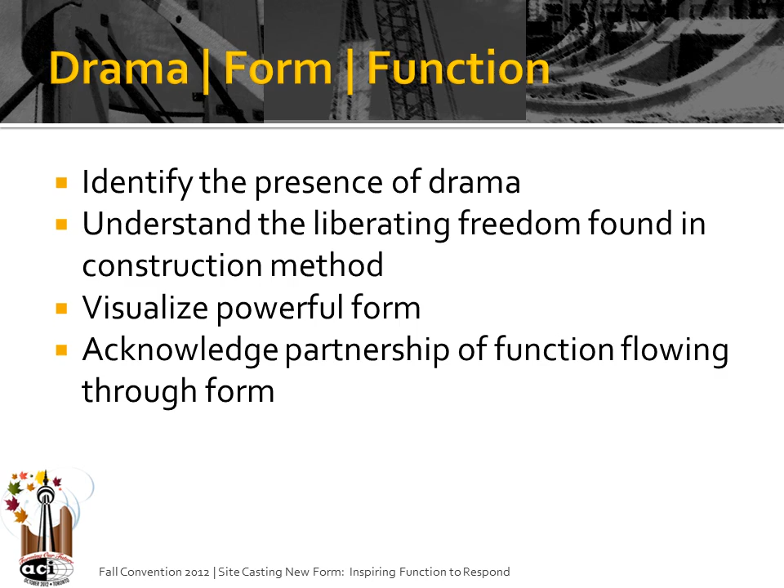I hope that you've appreciated it. I hope you've learned something. I hope maybe you have some questions that I can direct to one of our three talented speakers, and we'll entertain those now. Or forever hold your peace. Any questions? Oh, come on, one question. Yes, sir, Ken.

Jim, there were some pretty dramatic design challenges shown there, and I'm just curious, were the projects in those countries designed by engineers there? I was very impressed with the challenges I saw. Good question. The South African projects were a tremendous collaborative effort. The Dominican Republic ones, I mentioned during that presentation that they have the fortune of the engineer and the contractor being of one mind. Now he has a very large team that he employs, and he does most of his work in BIM modeling. But certainly when you have engineer and contractor either in the same person or working very closely together, it's much easier.

But in the South African projects, which I think are by far the most striking projects out there, oftentimes it's an architect that comes from Europe. It's an engineer that is maybe either a European engineer or a South African engineer that is truly looking for outside expertise, and through the contractor have been able to bring in consultants. I think the Sibaya Casino project for sure, as well as Gateway Theater Shopping, there were 4 different consultants that were brought in from the U.S. And the contractor was a concrete contractor from South Africa.